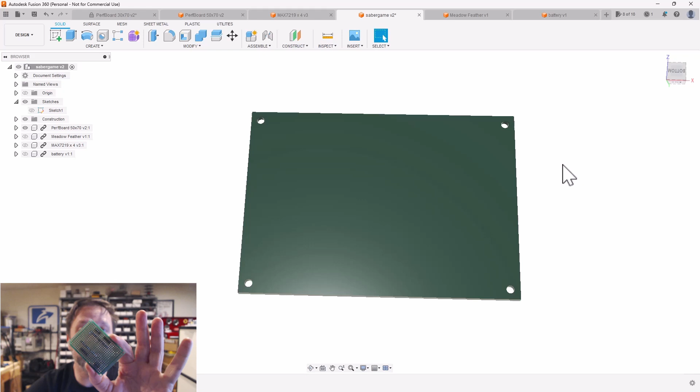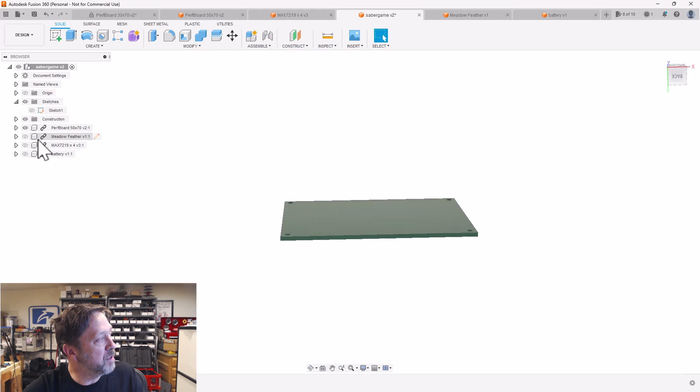Notice this has a whole bunch of perforations and things like that in it. But for my purposes, I don't really care. I just need to know where these corner holes are, where the screws are going to go through. And obviously I need to know length, width, and thickness. So when you have something like that, you can then design, for example, the feather board. Again, you can see that's not very complex.

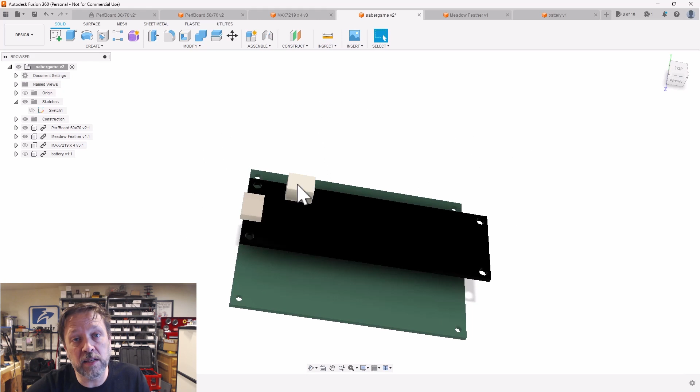I've got the mounting holes and the size, but then I also have these connectors. Connectors are important because I know that I have to plug the battery in here and I have to plug USB in here, but it also can't interfere with other things. This has some chips on it. I'll just keep that in mind as I'm going.

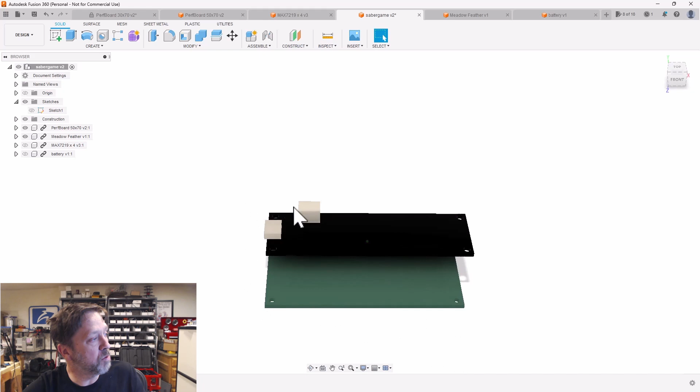Now, I did measure the distance between here and here, so that they match what I have in the physical world, but I didn't put all of these other connectors and pins and things on because it just isn't really necessary. So once I have that, then I also know that I have my display. Again, this one's a little bit more complex. I rotate it around here for you.

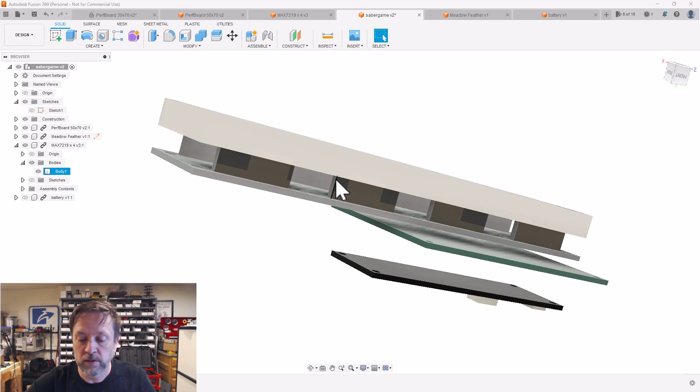You can see I actually went through and I put the connectors on here. You can see I've got the mounting holes in here, as well as the physical dimensions so that it matches the piece that I have here. And this is roughly where I'm going to put it. I can still move these things around.

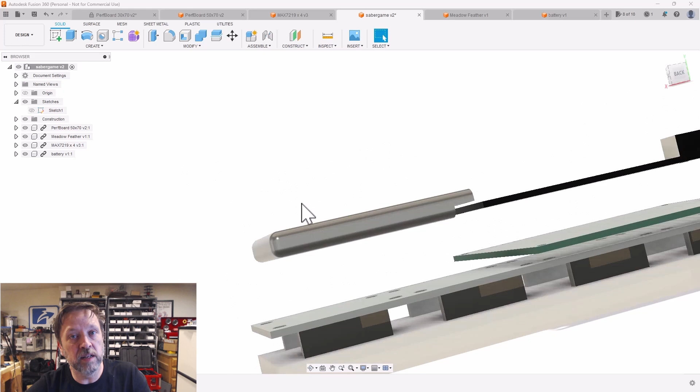But the other thing I need to keep in mind is, let's see, I also did a battery. You can see the battery is not all that complex. The important thing, again, is physical size, that it matches what I have here. So then I can put these into the CAD drawing and stack them up and move them around to try to get things working.

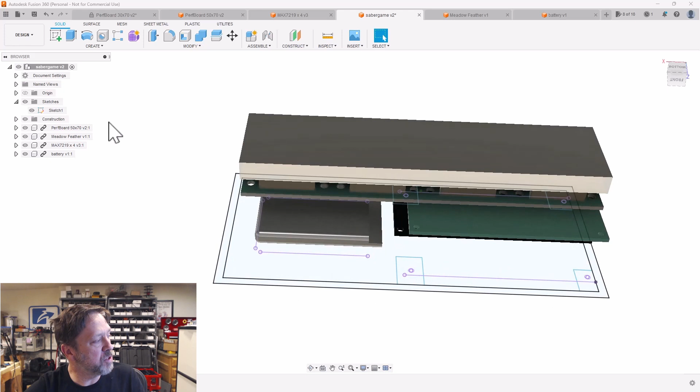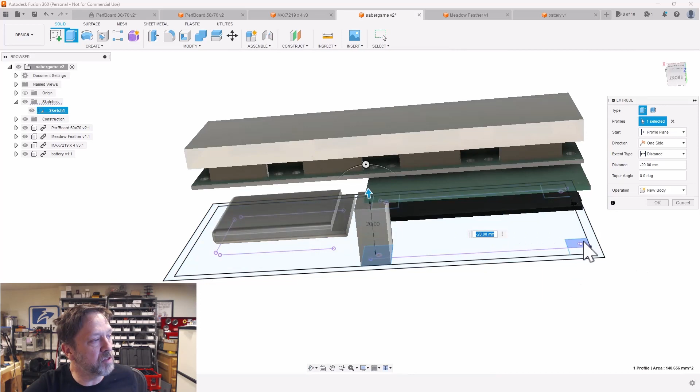So once I kind of have them stacked up where I want them, I can then draw a sketch such as this, and then I can go, okay, well, I'm going to project these holes, these mounting holes, down onto that surface, and then I can do things like take this piece and I know I'm going to extrude it up to here, and then I can put a mounting hole in that. So we can extrude those all the way up.

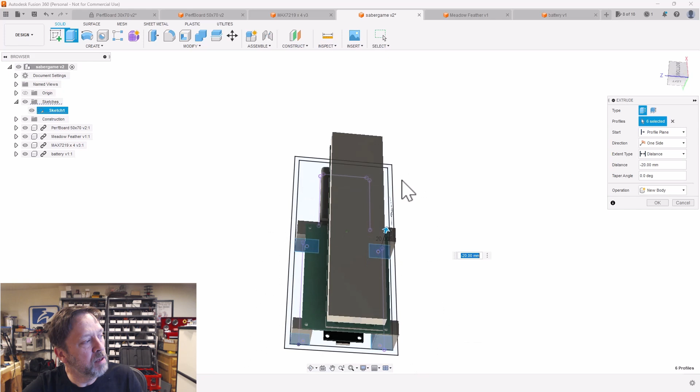And then now I have a mounting piece for this board, and the Meadow is mounted to it. So then if I put some holes in that, I can put in screws. So that is my general process on this. I still have a lot of work left to do on this. Have to do a whole bunch of measurements. There are connectors that need to go in and the buttons from the top and the bottom. But that kind of gives you an idea of how I approach it.

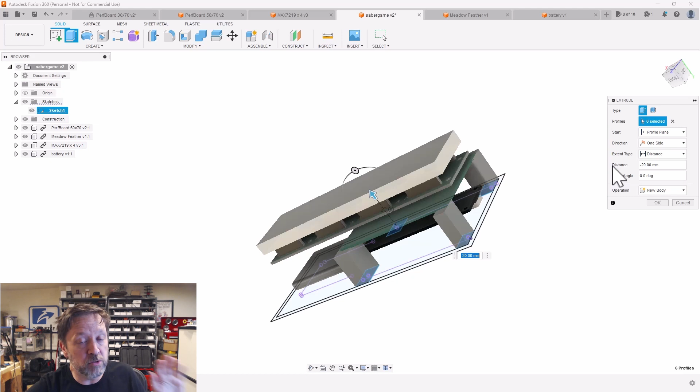I always design the thing that goes into the enclosure first so that I can put it into the drawing, and then I draw the enclosure around those. If you try just drawing the enclosure based on measurements, it never works out for me.

Pardon the noise, the printer's running.

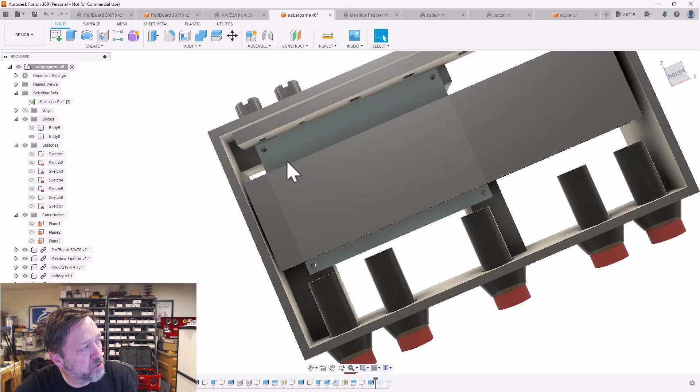But generally speaking, what I'll do is once I have an enclosure that I think is fairly close, and this one is, the question that I really have is about this fit. Do these holes work? Does everything go together? You can see I've got the buttons on here. I have a couple of these plug sockets; they'll go in all of these holes. But you can see, generally speaking, I have it figured out.

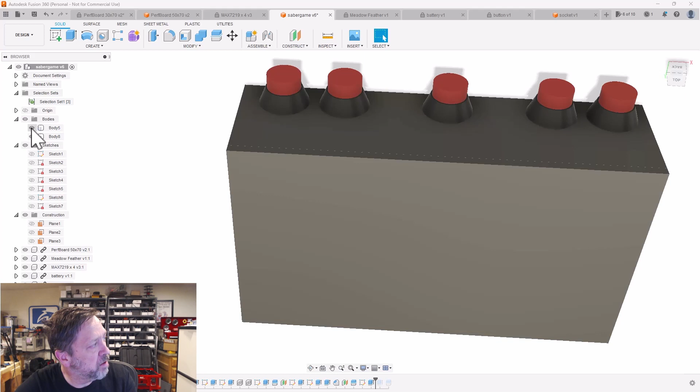I actually have a bottom for it as well, but the bottom I'm not at all concerned with. Bottom and top, those are easy. It's this main body, and rather than printing the bottom as part of it, which would just take longer, I'm running a test print. So I take this and I just export it to an STL, and then I import this STL into the slicer.

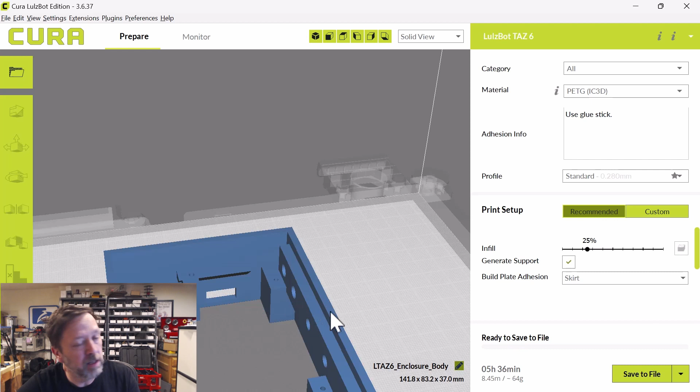You can see it looks fairly good. I did not put any supports on it, so it'll be interesting on these holes if those print out okay. I tried to bevel everything, so these shelves that hold things either go all the way to the bottom or they're beveled. So the general rule here is I put this together, and it looks like about 5.5 hours. We'll run it through the printer. Hopefully, on the first pass, I'll be really, really close.

Typically I end up adjusting the size of the holes for either heat set inserts or for thread size, things like that. I might have to add in some supports. Really, this first print is just to see how close I can get. My luck is I'm never right the very first time. Once I print this out, then I can adjust everything and design both a top and a bottom for it, then hopefully print the finals.

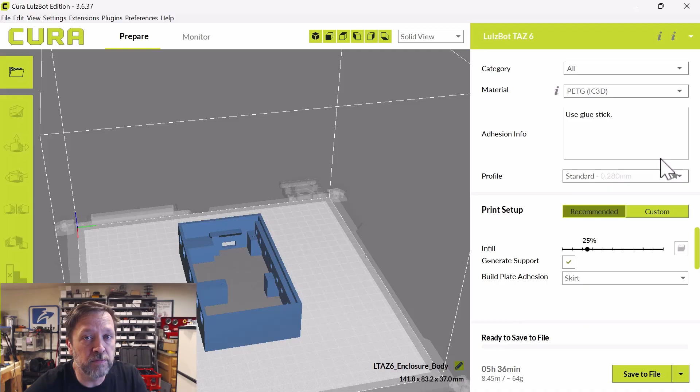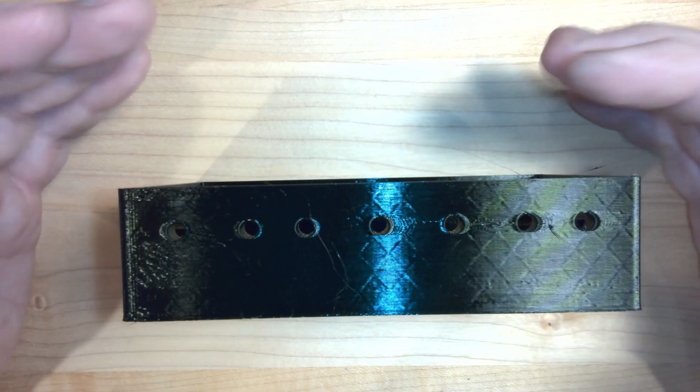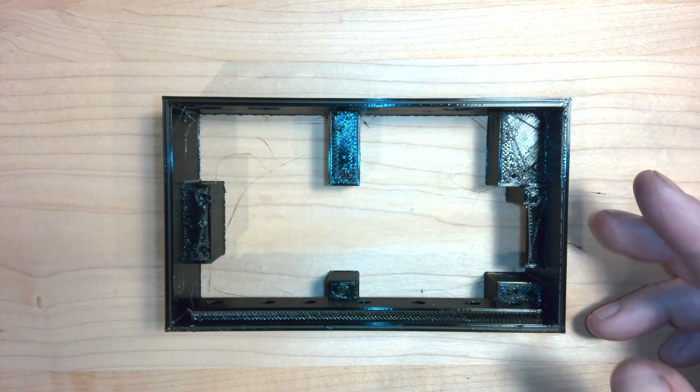All right, let's take a look and see how we ended up. Again, I didn't print this with a bottom on it, but the more I think about it, I think I'll build it with a top and a bottom that are separate, and they'll sandwich together and maybe have bolts that run all the way through to hold it together. Well, let's see how the fit worked out. First, I've got our perf board and the Meadow, and they're going to go in inverted like this.

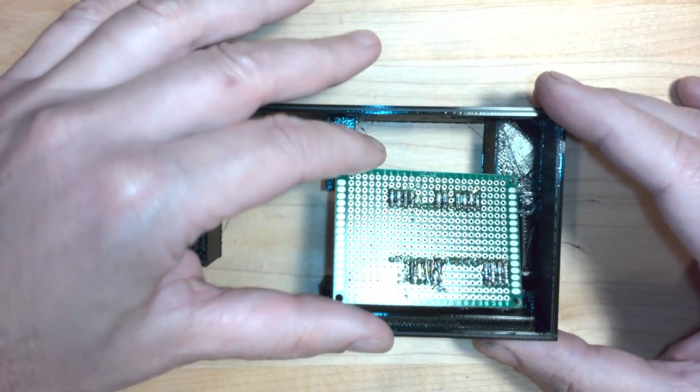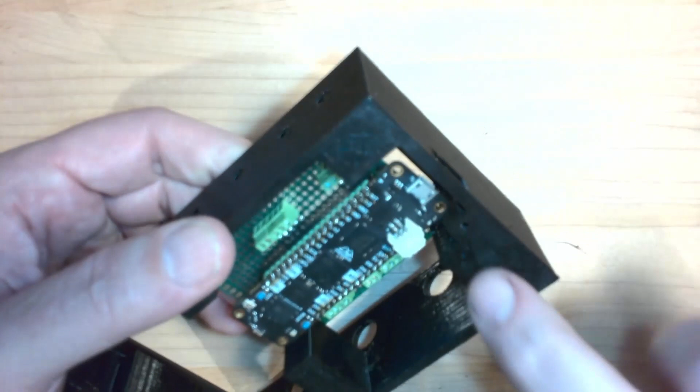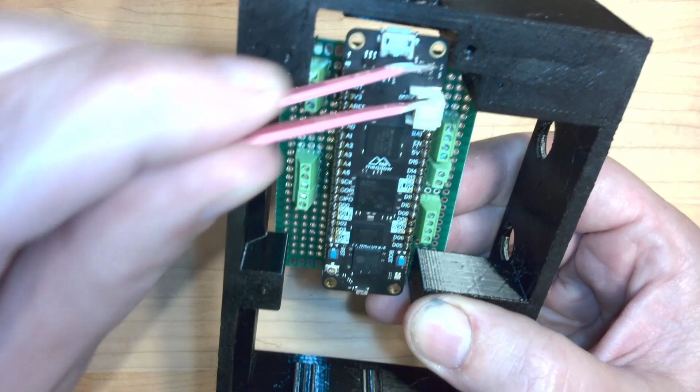So the idea is it will sit. You can already see it's not wanting to go in. It's real close. I probably need to take about 1 millimeter off right here. You can see it's intersecting. Let me find something to point with. This will work. So right here, I need to shave a little bit off in order to get it to go in. So there's the first problem.

Let's take a look at this. That seems to be lined up just fine. Let's grab a USB, see if I can get it in there. The height of the hole might not be big enough. When it moves forward, I might be able to plug it in. This is a fairly fat connector too, so I might increase the height of that hole. So of course I didn't think about this. This is why I should model these connectors.

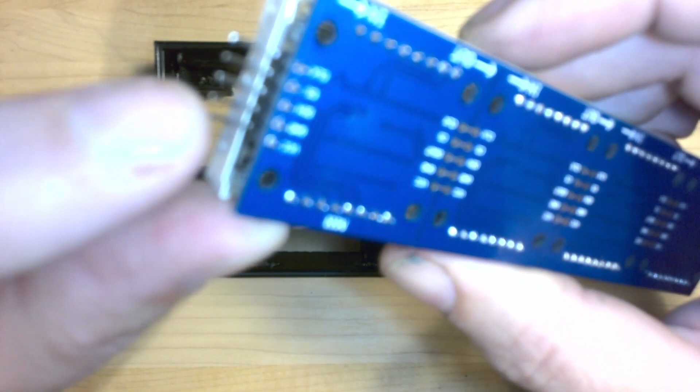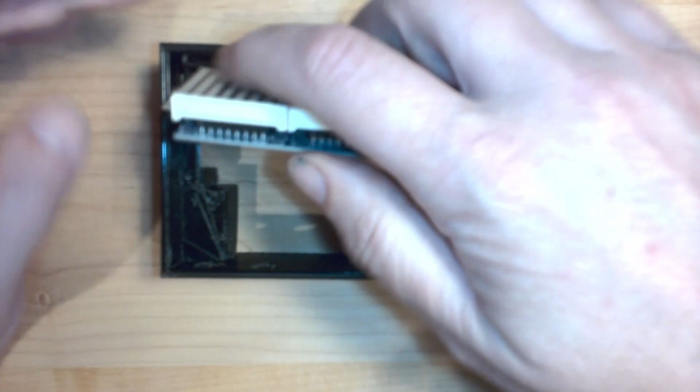You can see this connector here, the pins come straight out, but they're obviously soldered in this direction. I could solder on direct down, so the width is fine, but the problem there is I filled in this, which is really a stand for the end of this. That has to get cut out so that the pins can go down through so I can connect a wire to it.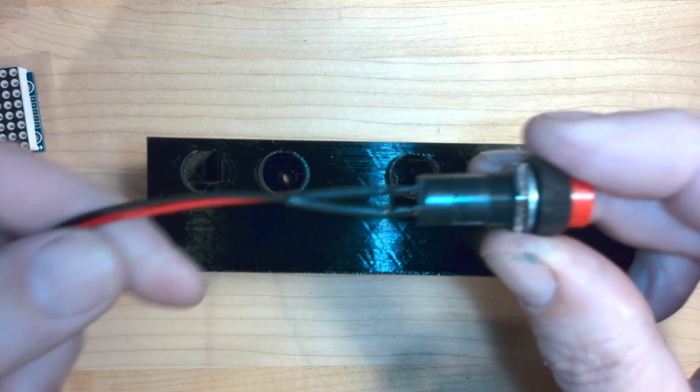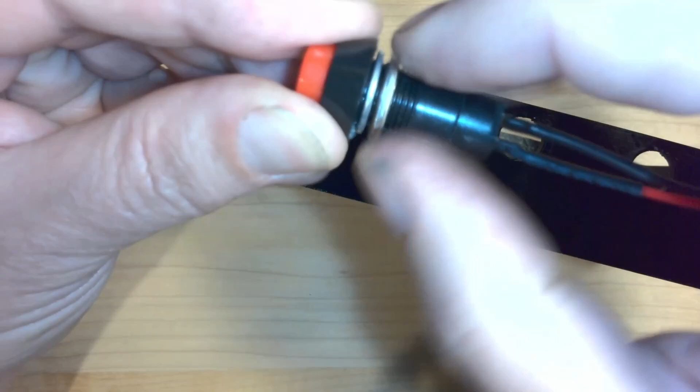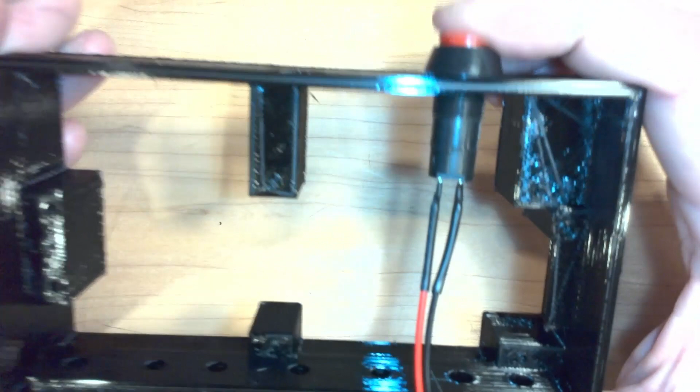Over on this side, we've got our buttons, and just pick a random hole. Oh, that worked. In fact, that works nice enough. Let's take a look if we take the nut off. So that looks really good. Now the question I have here, let's flip it around, is when I push on it, yeah, you can see it flexes right there. It's probably going to be even worse if I go with the middle hole.

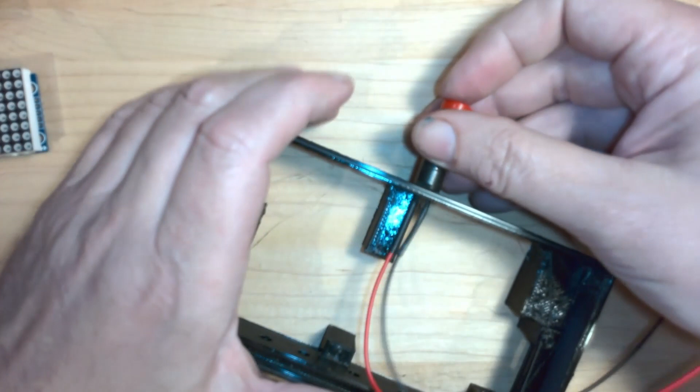This will be the reset. So we've got a fair amount of flex, but the perf board will connect from here to here, making this rigid. So I think that's probably good enough.

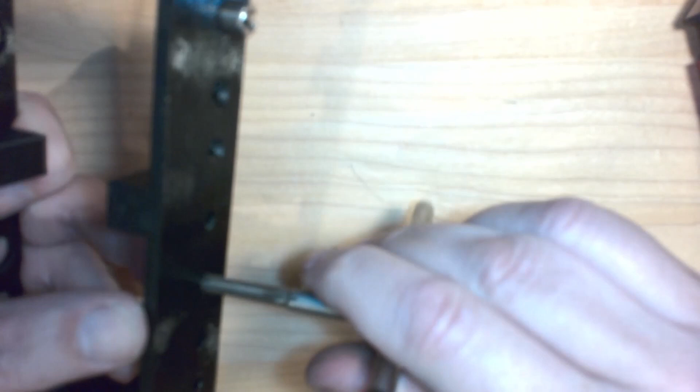I did a little more thinking on the socket, and this hole actually works really well if I tap it. Don't know why I didn't think of that in the first place. So I've just got a tap here. This is an M6 by 1, so 6 millimeter by 1 thread per mil. Yeah, 6 by 1. If I put that in, the non-chamfered ones actually fit just fine. But if I run this in, then I can just take this nut, and boy, that just goes in super, super nice and easy.

If you've got a soft material and you're trying to thread something into it, if you're concerned about the tightness of that, what you can do is use a helicoil kit or a thread repair kit, make the hole one size bigger, run the outer tap in, and then you put in basically what looks a lot like a spring, but it's a set of threads that go in, and then you end up with metal threads in this soft host material, and then you can put this in, so then you have metal thread on metal thread. It holds a whole lot better.

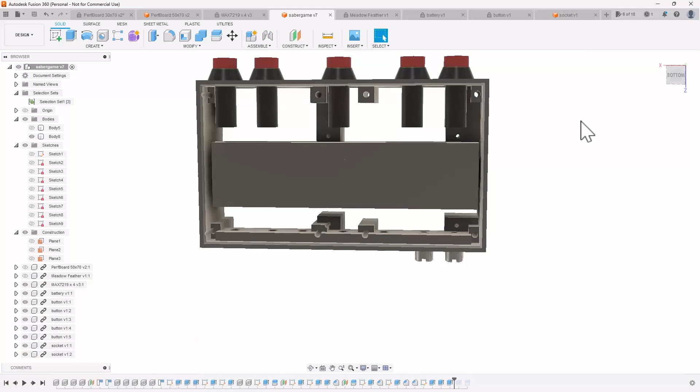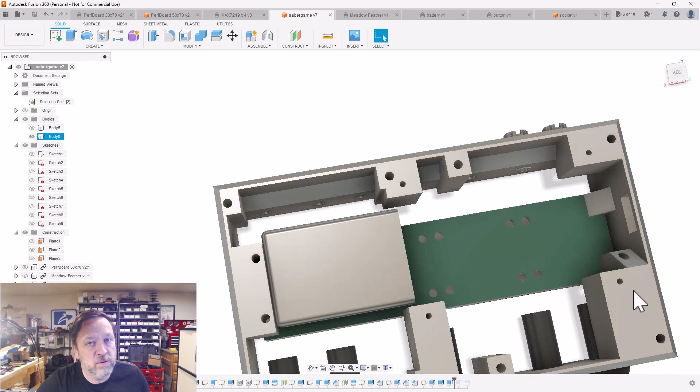So that's it for now. Like I said, I've got to go back to CAD, get some of that work done, make some modifications, and print out another one. While I was in here making these modifications, I did a few other things. So on the bottom, you can see I beveled this. I basically ran a chamfer all the way around the bottom, so it's not square. Did it on the outside edge, because if I had tried to do it on the inside edge, then these flats would have been raised up, and this is the bottom. The idea here is that the bottom piece is a flat piece, but it will have a lip that comes up into that chamfer all the way around. It'll help the bottom lid, I guess, center on it.

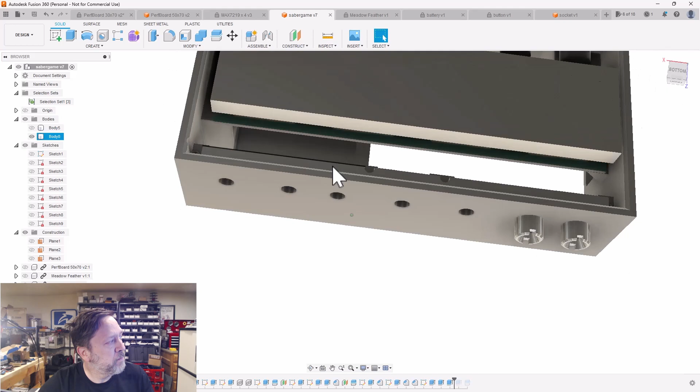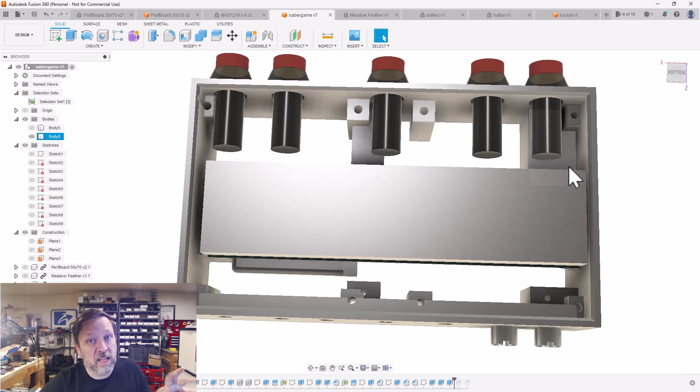And then on the top, I did another chamfer, but this one I did on the inside, again for the same reason. That way when I create this faceplate with the hole for the display, it has something that helps it to center. When you're making modifications based on interference or things like that, basically you've done a print and you're doing modifications, try to think ahead to next features that you also might need. It helps you with that iteration rather than just changing things and then printing it. Try to fix some old stuff and try to add some new features if they don't interfere. Again, this thing takes 5.5, 6 hours to print, so the cycle time is really slow. So the most you can get done in any iteration, try to do that.

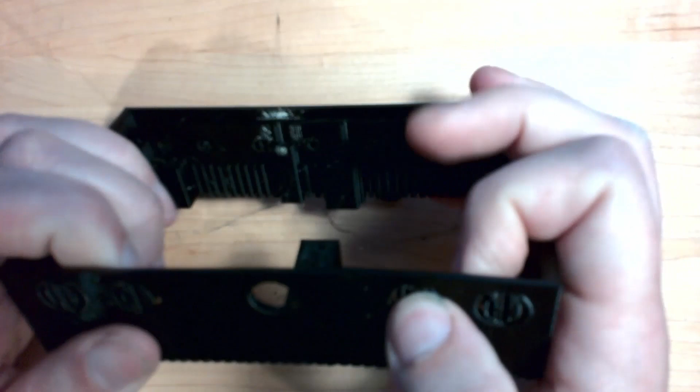Well, the first thing I notice is that I screwed up and left the supports on. I didn't want them or need them. It probably won't hurt anything, but I find that supports like that are really hard to get out of these little holes. And they do nothing but get in the way. So now I got to clean that up. It's really stringy, it looks like, too. Maybe I've got something set with the temperature just a little bit off. Whatever, that can be cleaned up. The important part is we got to check. Oh, let's get that out of there. Now let's check this fit.

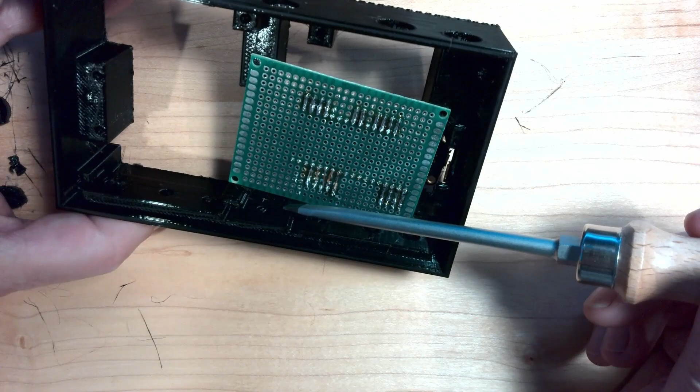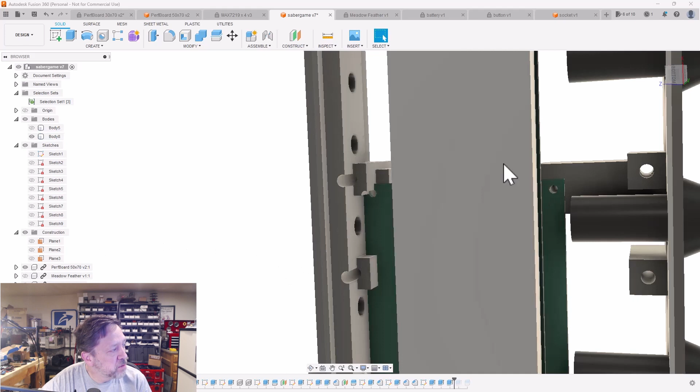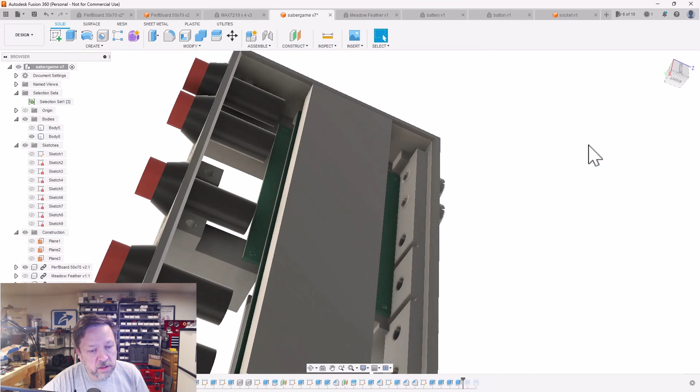Oh, man. Should have known better. The boss that I added here is in the way here. You can see, here's that boss I added here and here. And if I show the perf board, it cuts right through it. Man, what a stupid mistake. We can take those two, extrude those, and now they're down at the bottom of that perf board. All right, now I just need to add in the button and print out number 3.

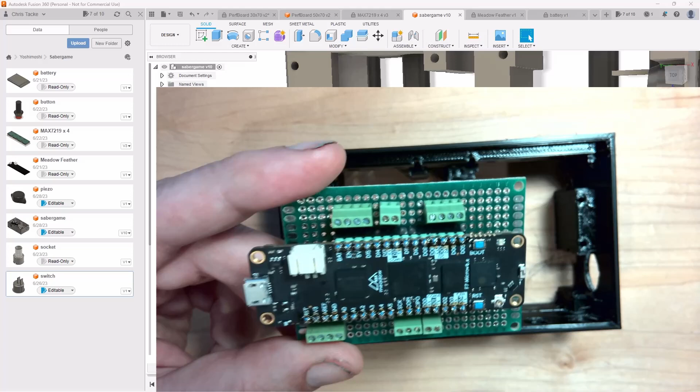Here's version 3 of the enclosure. We're getting really, really close, and of course I made another one of the fundamental mistakes. If you look over on the design, right in this area, I don't have the connectors, the screw terminals on this perf board, but there are screw terminals on here. And this screw terminal impacts right here. So when I attempt to put this in, so we're looking at it just like we have on the screen, right here hits this.

Now I did take the soldering iron and melt a big hole in here just so I could get some fitment testing. And with that melted, it seems to fit. I'd have a real hard time getting wires into either of these two, so I'll have to reprint it with that cutout. But it at least lets me test the fit.

Then the display is going to go on here, but again, I've got to deal with these. I don't want the wires coming off. I'm going to have them going straight down. So I can actually deal with that right here, right now. Then I'll clean that up and solder onto that.

But those fit there. You can see when I move the display, it's moving this. So in fact, I need to lift it up just a hair or push this down a little bit. So those are a little too close. So glad I checked that.

Got my power switch. It's going to go in right here. I'm not going to push it all the way in because then it'll be a real pain to get back out. But it seems to want to, well, I guess I will push it all the way in. So, power switch seems to be fine.

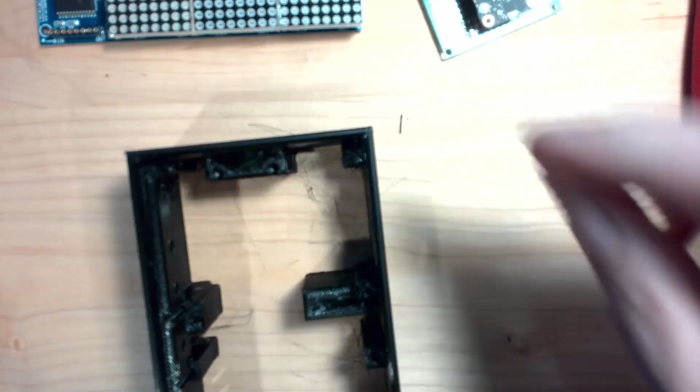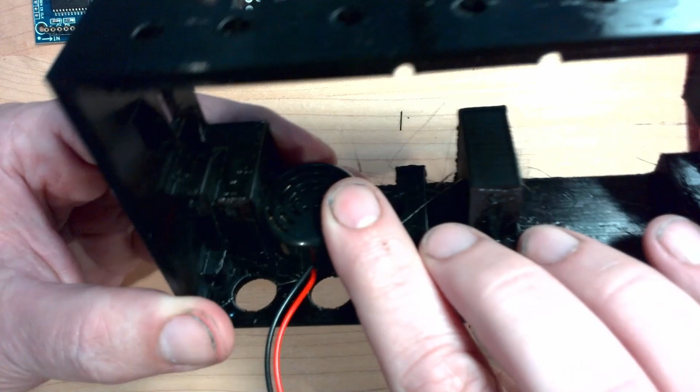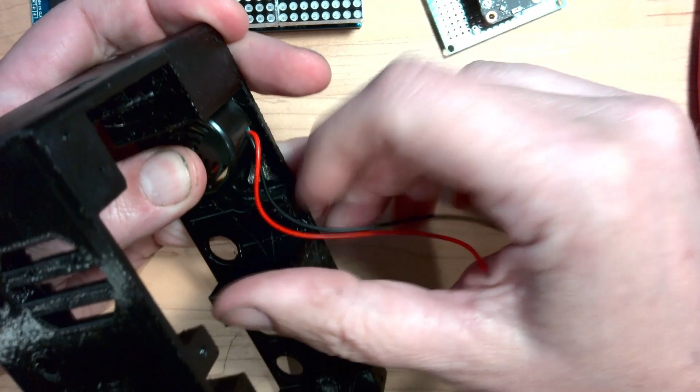I did forget the piezo, another mistake of not having the hardware sitting in front of me. I forgot to include it. Actually, I'm going to have it probably just about like that. So I've got to cut out for it. I'll put it in. It can go either way. Got a little space there for the wires, so it fits just fine. It'll take a couple of screws or something like that there.

You can see I left an opening here so that when that's in there, the sound can travel across and come out here, so I won't muffle it too much when it's closed. Let's see. That's it. So we'll try version 4. I'm going to cut that down and give more space between the display and the perf board. A couple of minor tweaks and it will be ready to go.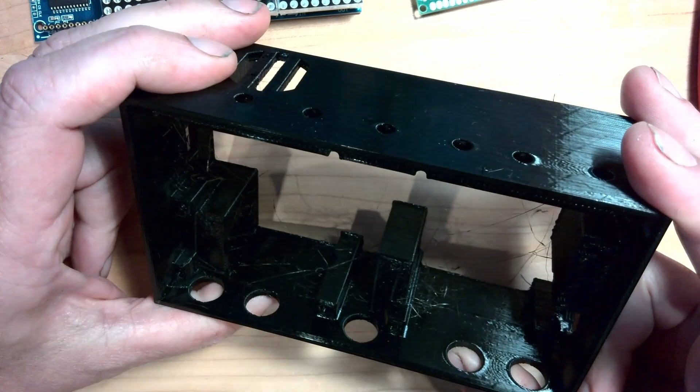Here you can see I've got it fully assembled. See if you can see down in there. So here's the perf board. The Meadow is underneath, so we can plug it in there. It's running on battery right now. The battery is down underneath here. Got my power switch. It does have a piezo here. It's not hooked up in code, but it is at least physically hooked up. And my buttons, I can press.

Turns out the downside on these buttons is they're not positive clicks. They don't have a reed switch or something in them. So they're really bouncy. I need to work on the code to make it so if you push it once, you only get one rather than two. Different ones have different behavior. I've done a little bit of work over here. You can see those are much better than over here. But those work. Reset works. This is positive, and then these two are grounded. I did make a mistake, and I didn't have holes for those wires, but I just drilled them out.

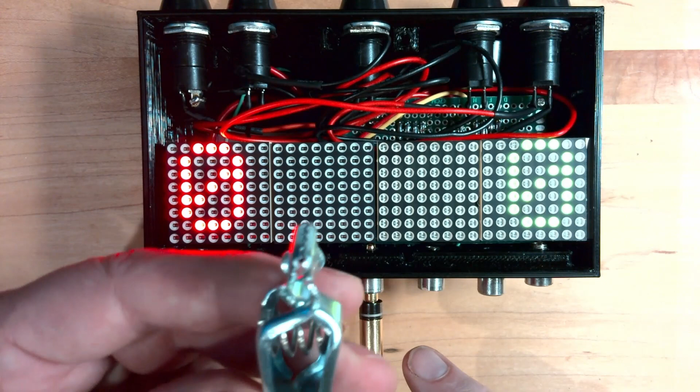So the idea here is this would be positive. We've got a connector that would just plug in like that. And then there's a wire that goes to an alligator clip that would hook up on the mask. So it becomes positively charged. And then the blades are connected here. And so when a blade connects to the mask, we get a touch on that side. So all of that is ready and working.

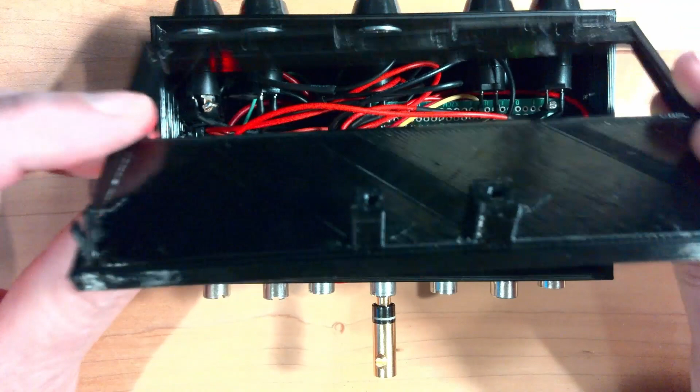I also printed out a faceplate for this. You can see it's got some alignment pegs, but this slides down right on there. I've got a little bit more code to do. Like I say, I'm going to add sound to it. We can also add some things like maybe a Wi-Fi REST service that would allow you to use a phone to set these, change them. You could even keep track of fencers and scores and a bunch of other things. But for now, this is fully functional. I'm going to work a little bit on the debounce of these, but it's ready to go.